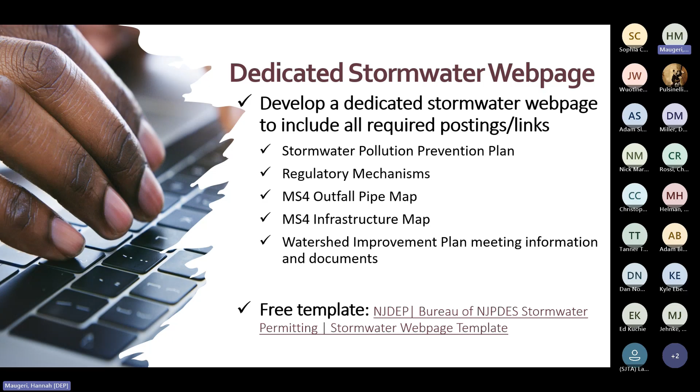Okay, moving on to local public education and outreach. The SPC will arrange for a variety of education and outreach to the public. This is required for all permittees, not just those that operate rest areas.

For highway agency permittees, we're using a 7-point system where you select at least 3 activities from the categories described in the permit attachment. One activity must educate on the hazards of illicit connections and improper disposal of waste.

Alternative activities can also count for this requirement as long as department approval is received prior to conducting the activity. Make sure to keep records of your activities and report them in your annual report. If you need ideas or materials, we have some on the webpage that you can use.

Here are the highlights of Attachment A, the point system for public education and outreach activities. These are just some examples of activities that we offer for points. We have designated pet relief areas, promotional item giveaways, some signage, education on regulatory mechanisms, storm drain inlet labeling campaigns, litter cleanup campaigns, etc. You can find a description of each activity as well as their associated point values in Attachment A.

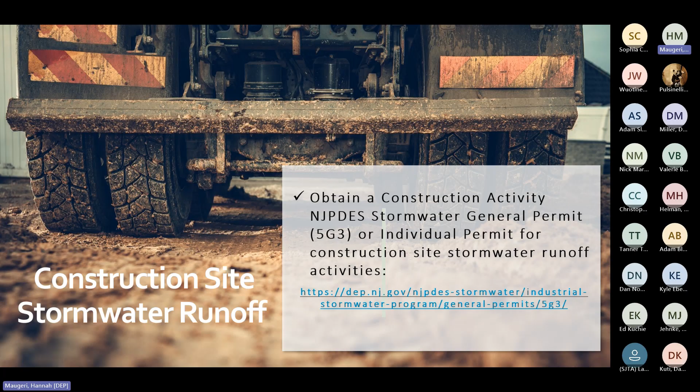Post-construction stormwater management in new development and redevelopment. This condition highlights the requirements related to stormwater management designs for major development projects. If you're the SPC but not the engineer, you won't need to know the technical details, but you do need to be familiar with the process.

Engineers who review and approve major development projects must be different from those who design the projects. They can work at the same firm if that's something you outsource, but please make sure that they are different people who review it and who design it.

Review engineers must complete the department's stormwater management design review, or SWMDR, course every 5 years to stay certified. They also need to attend training on rule amendments if the department determines that training is warranted. We'll talk more about this when we get into the training section.

You can check out our webpage for the list of department certified engineers to confirm the status of the engineer for your facility.

The reviewer must ensure that the projects are designed in accordance with NJAC 7:8, the BMP manual, and constructed according to the approved plans.

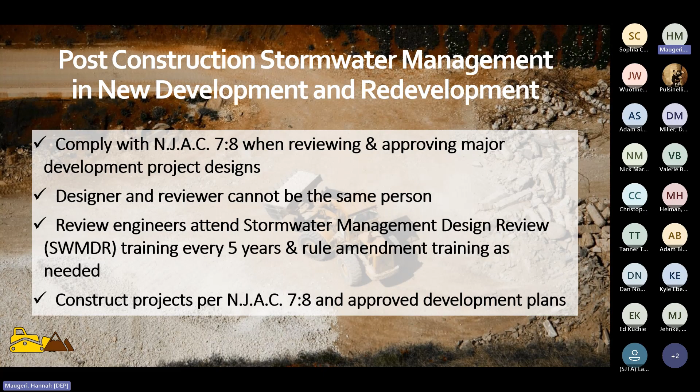For mitigation plans, if your facility wants the ability to grant variances from the design and performance standards for your stormwater management measures, there needs to be a written mitigation plan that satisfies the criteria in the stormwater management rules. It needs to meet and identify the measures necessary to offset the deficit created by granting the variance.

Each time your agency grants a variance, you need to send a report describing the variance to the department via NJDEP online within 30 days of approval.

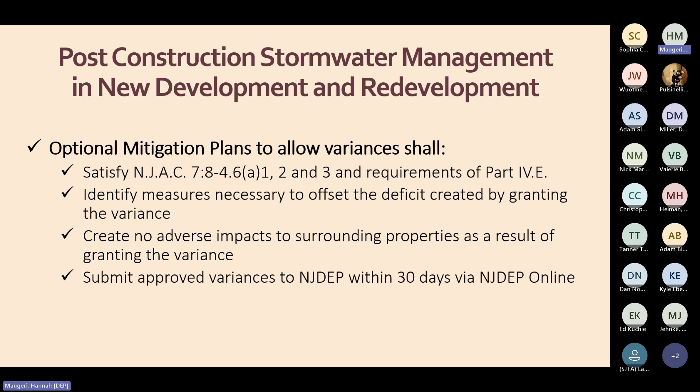Okay, moving on to regulatory mechanisms. Regulatory mechanisms are aimed at minimizing stormwater pollution and flooding throughout the highway agency properties, not just at major development sites. The purpose of community-wide regulatory mechanisms is to have methods in place to keep pollutants out of stormwater so it doesn't make its way to streams, lakes, and other water bodies.

These pollutants can contribute to harmful algal blooms, cause beach closings, and a host of other negative impacts. Regulatory mechanisms help to keep the community clean by setting a standard for the public and ensure you have a way to punish those who violate these regulatory mechanisms.

So we're going to go through each regulatory mechanism briefly. We're going to start with pet waste. The intent here is to get people to clean up after their pets so their waste stays out of the stormwater system and ultimately out of the watershed. Highway agencies can also use this mechanism to completely prohibit pets from being allowed on highway agency property.

Wildlife feeding. The intent is to stop people from feeding wildlife, like ducks and geese, for example, to discourage them from gathering where they can leave droppings on public property that also pollute the watershed.

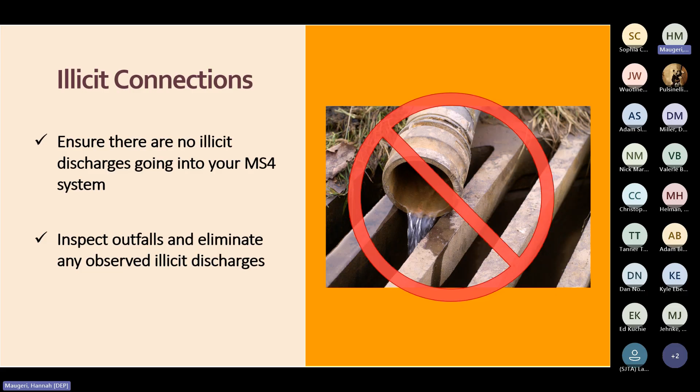Litter pickup program. All permittees must develop a litter pickup program that includes roadside cleanup of trash and debris and regular collection of refuse from litter and recycling receptacles, including those located at rest areas. You must maintain records of roadside cleanups and estimates of the total amount of trash and debris collected.

Street sweeping. Sweeping streets provides more than just aesthetic benefits. It keeps dirt, debris, and litter out of the stormwater system where it would otherwise pollute the watershed. It helps alleviate flooding from clogged storm drains and can help reduce the frequency of catch basin cleanings. This requirement was not changed from the last permit. You're only responsible for sweeping roadways that you own and operate. While these are the minimum requirements, the permittee must sweep more frequently as necessary to eliminate recurring problems.

First we have quarterly street sweeping. The permittee shall sweep at a minimum of once every 3 months all segments of limited access highways, which includes ramps and parking areas that have storm drain inlets or discharge directly to surface water.

Triannual street sweeping. The permittee shall sweep at a minimum of once every 4 months all segments of streets, ramps, and parking areas that have storm drain inlets or discharge directly to surface water, but are not considered limited access highways.

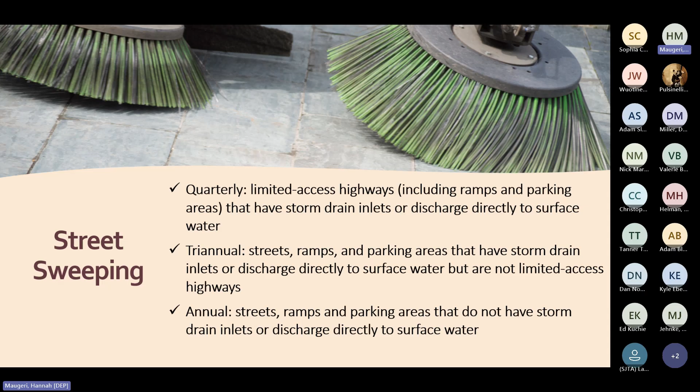On the left here, we have a photo of a rest area parking lot with inlets that discharge directly to surface water. This needs to be swept 3 times a year under the highway agency permit. On the right, we have a photo of a limited access highway, which needs to be swept 4 times a year under the permit.

Streets, ramps, and parking areas that are owned and operated by the permittee, but do not have storm drain inlets or discharge directly to surface water, only need to be swept once a year.

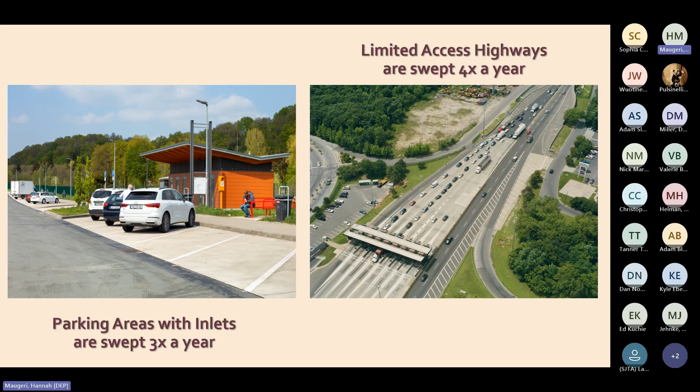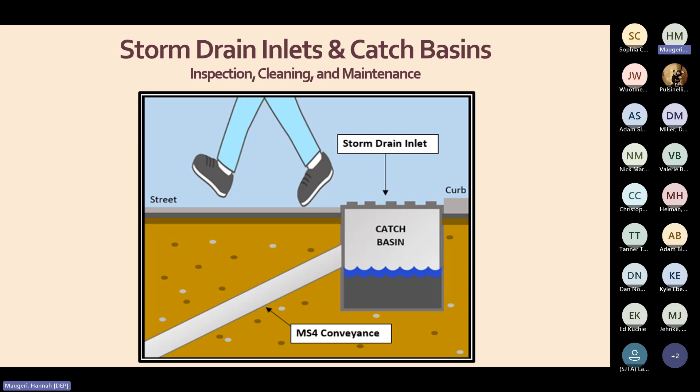Let's talk about the difference between storm drain inlets and catch basins. The storm drain inlet is the top grate that you can walk or drive over, and if it's along the curb, it includes that curbside opening. We consider the inlet to be the parts you can see on the surface. The catch basin is below the surface, typically straight below the inlet, but sometimes further down the pipe, where it catches any debris that falls through the grate.

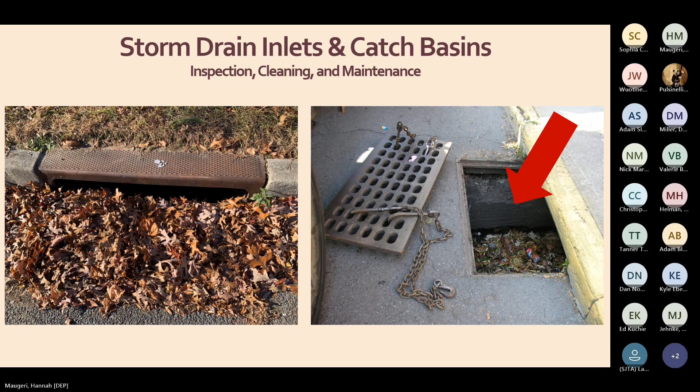All permittee-owned storm drain inlets must be retrofitted by the end of the permit cycle, which is by the end of 2029 for highway agencies.

New storm drain installations must have a corresponding catch basin or other BMP designed for solids collection. It can be directly below the inlet or downstream of the new storm drain inlet, as long as it's prior to the discharge to surface water. Exemptions for this condition include storm drains built on bridges or culverts, or when additional hydraulic losses will result in unavoidable adverse impacts. So that's about it for storm drain inlets.

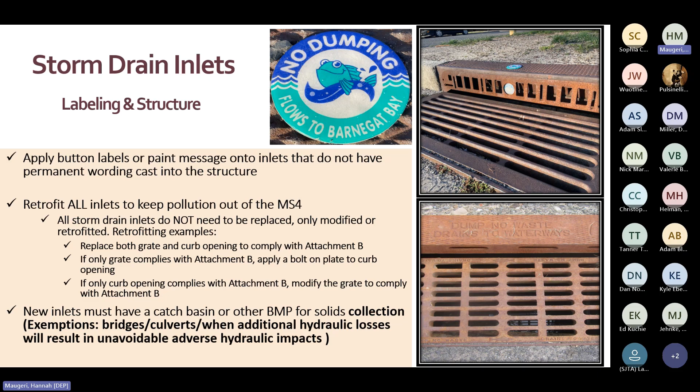Let's talk about the inspection and maintenance of storm drain inlets and catch basins. For inlets, these inspections can be done by driving to each inlet and just hopping out of the truck if trash, leaves, branches, or other debris needs to be removed, or if you see signs of damage. For this reason, we require that all permittees inspect all storm drain inlets every year.

For catch basins, this involves a little bit more work. The inspector needs to get out of the truck, look down inside with a flashlight, or maybe lift the grate to see if the catch basin needs cleaning. If the highway agency operates or maintains more than 2,500 catch basins, the requirement is to inspect a minimum of 20% of the total every year, on a rotation, so that by the end of the permit cycle all catch basins have been inspected. If the highway agency operates or maintains less than 2,500 catch basins, then they must be inspected annually.

When it comes to catch basin cleaning, please check the manufacturer's recommendations first. The EPA also has a guidance document where they advise removal of materials once the sump pit becomes 40% full. So just keep that in mind.

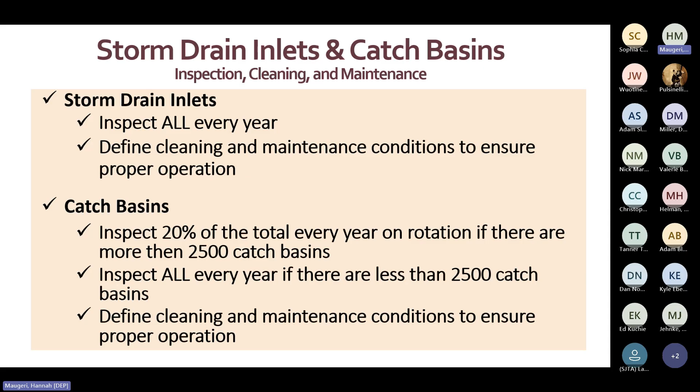Okay, moving on to outfall inspections. For highway agencies, the requirement is to inspect a minimum of 20% of the total amount of outfalls you have every year, on rotation, so that all outfalls are inspected by the end of the permit cycle. The department offers outfall inspection forms on our webpage to document your findings. These inspections must include checking the overall structural integrity of the outfall, clogging, and instances of stream scouring and illicit discharges. So the next two slides will focus on scouring and illicit discharges.

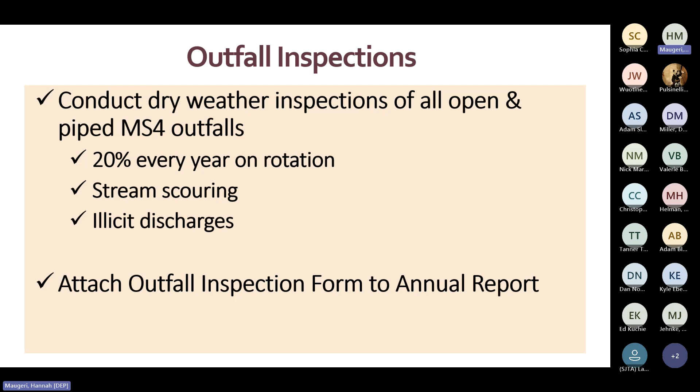Starting with stream scouring, this can present as gouging out of the stream bank, undermining the outfall structure. Scouring erodes soils, clogs stream beds, and ruins habitats. When performing inspections, note if the soil is eroding away around the outfall and if stabilization is necessary. And just so it's understood, scouring inspections are required for all outfalls, not just those that discharge to streams.

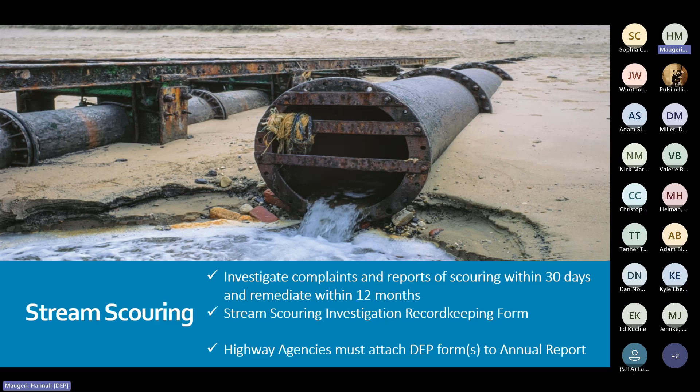All reports of stream scouring must be inspected within 30 days, and confirmed cases need to be remediated within 12 months of discovery, unless the department approves an alternative timeline. The department has a form available on our webpage to document stream scouring cases.

Illicit discharge detection and elimination. When you're inspecting outfalls for illicit discharges, look for instances of dry weather flow, which means a flow coming from the outfall 72 hours after a rain event.

Other indicators include foam, turbidity, colored or overly fragrant discharges, and the presence of sanitary waste items. All reports of illicit discharges must be inspected within 30 days, and confirmed cases need to be remediated within 12 months of discovery. All permittees need to use the department's illicit discharge form and upload it with the annual report.

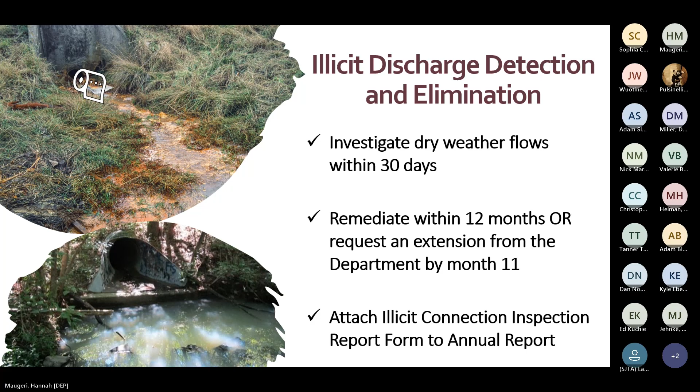All right, moving on to MS4 conveyance systems. Stormwater conveyance systems include any man-made features that convey stormwater. This typically means pipes, ditches, swales, and concrete drainage channels. This also includes cases where the structure below the inlet does not have a sump and therefore isn't a catch basin. Those situations should also be treated as conveyance and maintained as such.

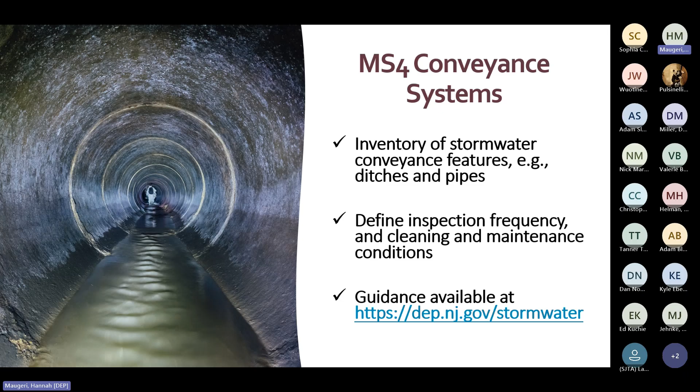This is not a new permit condition for any MS4 permittee, but what is new is that you need to describe your inspection and maintenance program in your SP3 and cover it during annual training of the staff who did this work. We don't specify in the permit exactly when you should do inspections and maintenance, since there's a lot of variation in conveyance systems. So just tailor your program to best suit your system, and the department has guidance available if you need it.

So far we've talked about inspecting storm drain inlets, catch basins, outfalls, and conveyance systems. These are the most common components of stormwater infrastructure, but we know there are other features our permittees use, so we created this catch-all condition. It applies for anything else you use to manage stormwater, things like basins, MTDs, etc.

For anything that falls in this category, explain what it is and define the conditions that warrant cleaning and maintenance per the approved maintenance plans. If an approved plan is not available, you can create one by following the department's best management practice manual or maintenance guidance, both available on our website.

If the feature in question is not included in our BMP manual or guidance materials, conduct inspections at least 4 times a year and after each rainstorm exceeding 1 inch of total rainfall. If any of the infrastructure is found to not be functioning properly, maintenance and repairs must be done no later than 90 days from discovery.

If you need any assistance, of course, you can always contact your MS4 case manager to help you or put you in touch with our stormwater engineering group to do inspections and maintenance, to point you in the right direction.

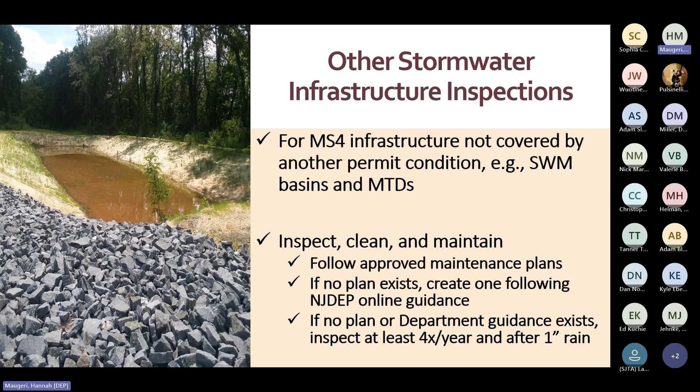Okay, moving on to herbicide application management. If you use herbicides to kill weeds, the permittee must ensure that they're being applied properly to prevent it from being washed into waterways and causing erosion from devegetation.

Avoid spraying herbicides on or near storm drain inlets and on steep slopes, and only spray in areas where it's unsafe or impossible to mow. When spraying around structures like telephone poles, keep it within a 2-foot radius.

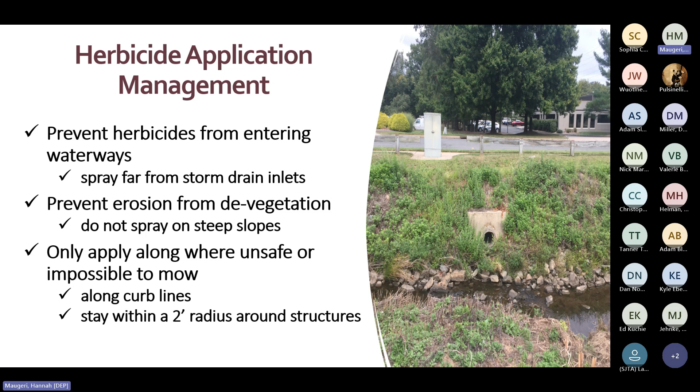Excess de-icing material management. The management of excess de-icing material is not related to how you store your salt supply at the maintenance yard. We'll talk about this proper storage later. This condition is aimed at cleaning up the little piles that are sometimes accidentally left behind in parking lots or along roadways where the driver starts up or stops the spreader.

Within 72 hours after a storm event, please check where your spreaders have worked to clean up any piles you find. This way, the materials don't wash into nearby waterways.

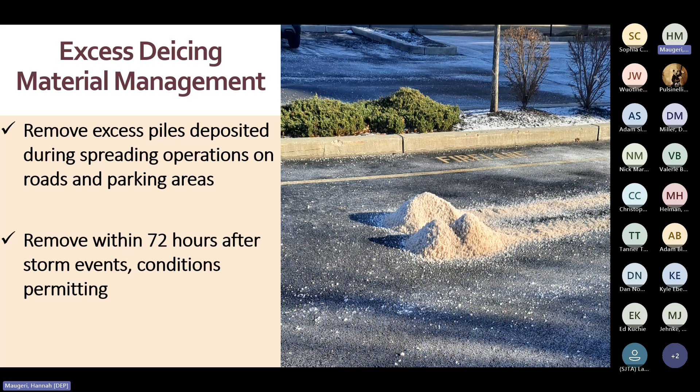Roadside vegetative waste management. Grass clippings, dead leaves, and tree branches that get into the MS4 have the potential to clog the conveyance system and cause flooding. These materials also increase the levels of nutrients and total suspended solids in the receiving waters, which may result in harmful algal blooms and interfere with the aquatic habitat.

This permit condition is intended to ensure that your staff are handling this type of vegetative waste in a way that keeps it out of the stormwater system. For example, you may choose not to bag grass clippings. It's okay to leave them in place. If you collect or clean up the vegetative waste, explain how you keep materials out of the stormwater system.

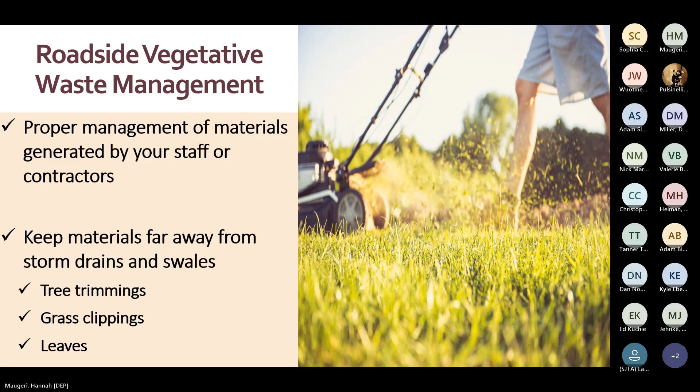Okay, moving on to tree replacement management. This permit condition comes into play when you're removing healthy trees from your highway agency property. These details are in the permit, but depending on the size of the healthy trees removed, you'll replace it with one or more trees. Removed trees are required to be replaced within one year of removal.

There are a series of exemptions to this permit condition. For example, if a tree is considered a hazard, you may remove it without needing to replace it. Hazard trees are trees that are diseased, infested by insects, dead, or dying. It's also fine to remove trees that obstruct traffic signs, pedestrian walkways, or safe passage of vehicles. And if you have a concern about the condition of a tree and an arborist declares that it's a threat, those are fine to remove too. This condition only comes into place when you're trying to remove perfectly healthy trees.

Roadside erosion control. Roadside erosion can cause sedimentation of receiving waters and stormwater infrastructure and can pose a public safety concern. For this reason, erosion inspections are required along all roadways, ramps, and parking lots you own or operate. You must have a roadside erosion control program in place, regardless of whether all roads within your facility are curbed or not. Erosion checks can be done while performing other stormwater inspections. If problems are identified, the department allows 3 months to address it unless another time frame is authorized.

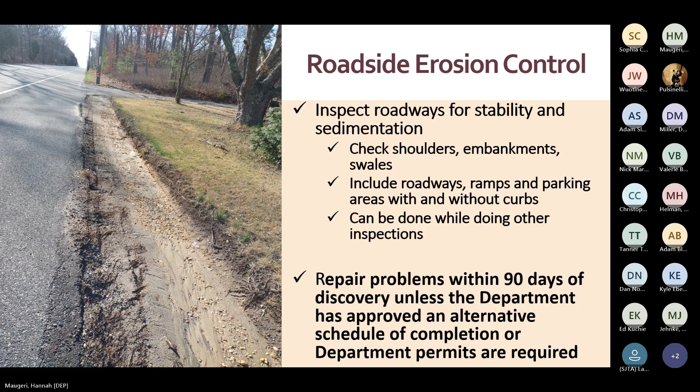Outdoor refuse containers and dumpsters. The permittee must ensure that refuse containers and dumpsters that are outdoors or exposed to stormwater are managed as follows. They must always be covered with a tarp, lid, or under a permanent structure to prevent contact of waste materials with stormwater, unless actively being filled or emptied. And they must be leak-proof to prevent discharge from the contents of the container.

Temporary demolition containers, or containers that hold large bulky items like furniture, do not need to be leak-proof as long as they do not contain waste. Litter receptacles and refuse containers at industrial facilities authorized to discharge stormwater under a valid NJPDES permit do not fall under this condition.

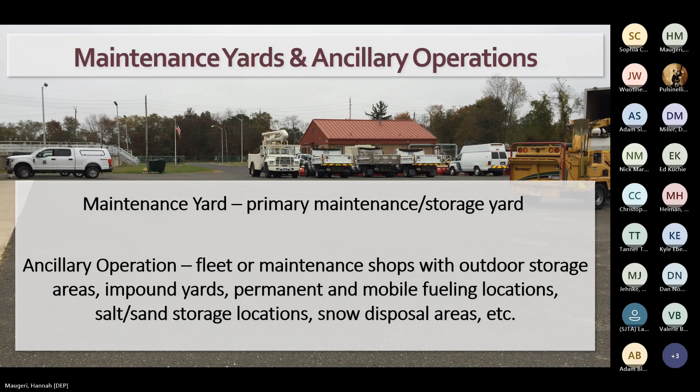Maintenance yards and ancillary operations. There are specific BMPs that must be implemented at each maintenance yard and ancillary operation. So let's go through them now.

Site inspections. Usually, DPW or maintenance supervisors will designate someone to inspect each yard, or will do this themselves. The inspector will note the conditions and document any work that is done or needs to be done to fix problems.

Inventory list. Keep a list of all materials and machinery that are exposed to stormwater, since they are potential sources of pollutants.

Container labels and storage. Label all containers so they are clean and easy to read. Protect containers from being damaged or spilled, making sure they are tightly closed when not in use. Containers stored outside should be covered and set on a spill platform, clean pallet, or in an area graded or bermed to prevent stormwater run-through.

Spill kits. Keep a spill kit near any liquid transfer areas and make sure it's protected from the elements. Be sure to use dry cleaning method only, for example, kitty litter or sawdust, and sweep it up for proper disposal afterwards. Bulk liquid storage.

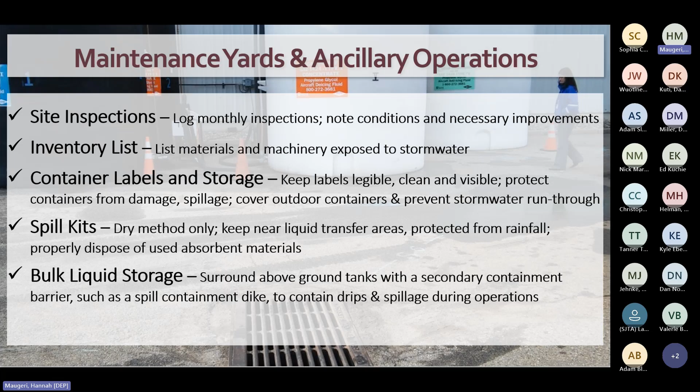Fueling and other bulk liquid operations. During operations, be sure to use drip pans below hose and pipe connections and block any nearby storm drain inlets. Don't delay repairs or replacement of broken fueling equipment. Post signs prominently in the fueling station to include the specific language outlined in your permit.

We have a sign template on our MS4 webpage. You can copy it if you like.

Discharge of stormwater from secondary containment. When you empty the stormwater from the collection areas surrounding the tank, be sure to dispose of it properly. If you have determined that it's clean, you can just open the valve and let the stormwater flow out. If it appears contaminated, or if you are not sure, haul it off site for proper disposal. If the contents inside the tank are clear, you may not be able to determine if any got mixed into the stormwater, so assume it is contaminated and haul it off site for disposal.

Vehicle and equipment maintenance. Perform these activities indoors whenever possible. If you must work outdoors, use portable tents and drip pans and work in areas far from storm drains, or block any nearby storm drain inlets.

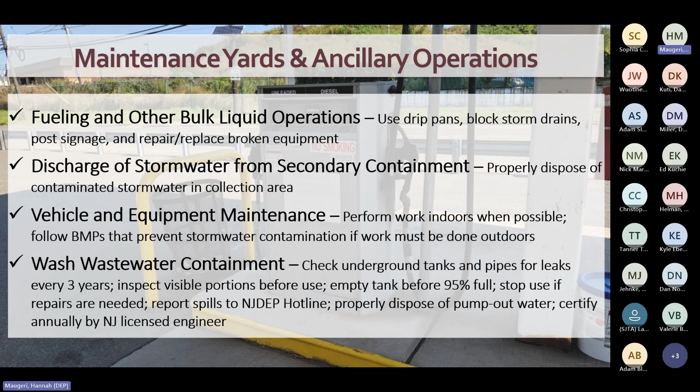Wash wastewater containment. Wastewater tanks need to be certified each year by a New Jersey licensed engineer. Underground tanks and pipes must be checked for leaks every 3 years, and the visible portion should be checked before every use. Check the capacity and pump out prior to reaching 95% tank capacity, and stop use immediately if repairs are needed. Report spills immediately to the NJDEP hotline and properly dispose of pump out water.

Salt and other granular de-icing and anti-icing material storage. These materials must be stored in a permanent structure and in a way that minimizes exposure to rain, snow, and stormwater run-on. If you don't have a door on the structure, that's okay. Just be sure to keep the materials from overflowing beyond the protection of the storage structure. Sweep up any tracked or spilled materials after loading and unloading.

Aggregate material, wood chips, and finished leaf compost storage. Store these materials at least 50 feet from surface water bodies, storm drain inlets, ditches, and other stormwater conveyance channels. Use a 3-sided storage bay, dikes, berms, hay bales, sandbags, and/or grading to minimize stormwater runoff and run-on. Storing these materials is fine, and finished materials may be stored on site indefinitely. However, if your site processes compost or does chipping, grinding, screening, or size reducing of wood waste or yard trimmings, you'll need an industrial stormwater permit for these activities.

Construction and demolition waste, wood waste, and yard trimming storage. Store these materials at least 50 feet from surface water bodies, storm drain inlets, ditches, and other stormwater conveyance channels. Use 3-sided storage bays, dikes, berms, hay bales, sandbags, and/or grading to minimize stormwater run-on and runoff.

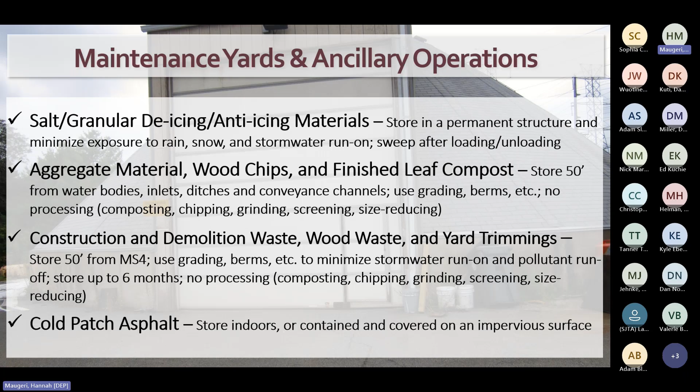Cold patch asphalt storage. This material must be stored indoors or stored on an impervious surface covered with a waterproof material and contained to prevent stormwater contamination.

Street sweepings and storm sewer cleanout material storage. Keep these materials in a leak-proof container or stored on an impervious surface and covered with a waterproof material and contained to prevent materials from contaminating stormwater. Materials may not be stored longer than 6 months, or the site would need to apply for a solid waste permit.

Scrap tires. Store scrap tires in a covered container or enclosure. If a covered container or enclosure is not available, tires may be stored on an impervious surface and covered with a waterproof material.

Inoperable vehicles or equipment. The designated storage area must be at least 50 feet from storm drain inlets. Use tents, covers, and drip pans under leaking vehicles and check them during monthly site inspections. And finally,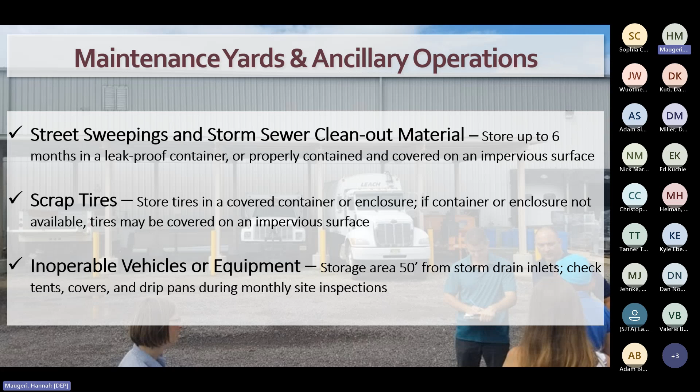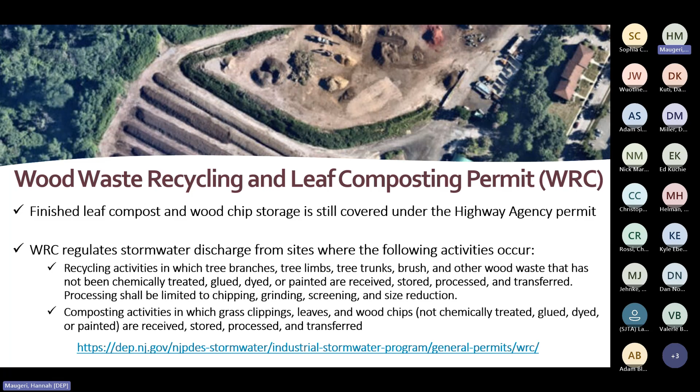Training requirements. As the Stormwater Program Coordinator, you are responsible to make sure everyone is getting the right training at the right time. You are also responsible for making sure training records are kept to demonstrate compliance with the training requirements. Let's go through each type of training requirement.

Stormwater Program Coordinator training. Yes, this is the training we're doing right now. We developed this training to make sure that the permit is interpreted and implemented correctly and consistently throughout the state. All Stormwater Program Coordinators are required to attend this training once every permit cycle, so about every 5 years. You are welcome to attend more frequently than this if you want a refresher, and you may also invite other staff who work in your stormwater program who want to attend.

During training sessions, we will be monitoring attendance and keeping records to make sure the SPC for every highway agency has been trained. If you change jobs or retire, someone at your agency needs to let us know who will replace you within 30 days. Your replacement must attend the next available live session. We plan to hold them twice each year. We suggest new SPCs watch the recorded training session posted on the MS4 website as an introduction to the requirements.

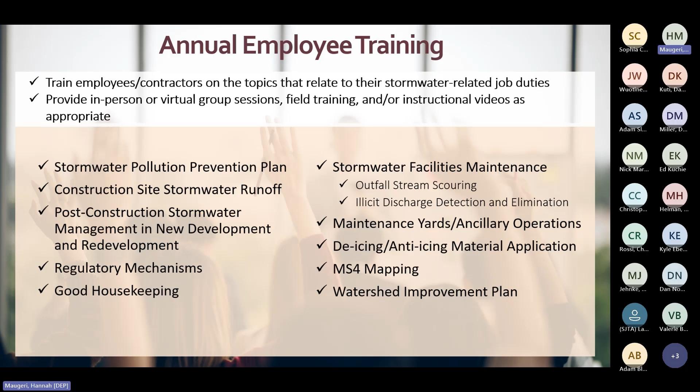You most likely don't have a training department, so a discussion of these topics should be conducted each year, led by the most knowledgeable person you have on each topic. For example, street sweeping training should probably be conducted by the DPW director. If you have a code enforcement officer, that person may cover the regulatory mechanisms. This can be done in a group setting or one-on-one in the field, in the office, or on the computer, however you see fit. The SPC is responsible for ensuring that all required training is held and all appropriate records are kept in accordance with the permit.

De-icing and anti-icing material application training.

With the 2025 permit renewal, you are now required to develop a training program on the application of de-icing and anti-icing materials to make sure that all individuals, including employees, contractors, consultants, vendors, or volunteers that apply de-icing and anti-icing materials on your agency's roadways, ramps, and parking areas, complete the de-icing and anti-icing material application training at least once per year. The training should emphasize procedures specific to stormwater pollution prevention, as this training is about more than just the layout of routes and the operation of machinery.

Make sure you document the training received by staff, including each participant's name, title, signature, dates of training, and instructors' names, and keep these records on file in your SP3. Also, make sure that external contractors, consultants, and vendors are properly trained by requiring compliance with the training detailed in your SP3 as a condition of the contract.

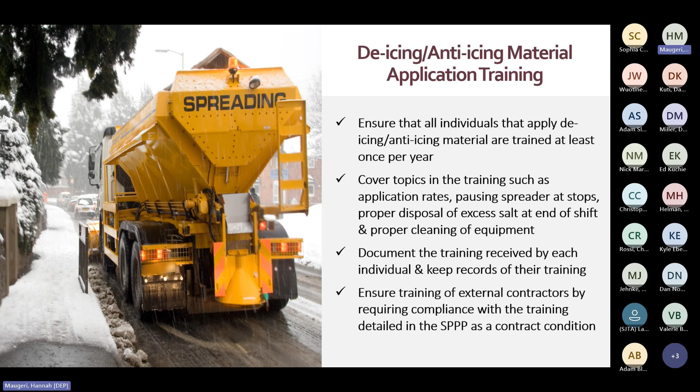Stormwater management design reviewers. The SPC must ensure that those engineers who review and approve designs for major development projects on behalf of the highway agency attend the department's Stormwater Management Design Reviewer training, which we call SWMDR. The purpose of the training is to ensure that projects are designed in accordance with the rules, so that once a project has been constructed, there is minimal impact on stormwater quality and runoff quantity or flooding.

This is a technical course which will cover the most current stormwater management rules, municipal stormwater management plans, municipal stormwater control ordinances, mitigation plans, and the department's BMP manual. This course is approximately 12 hours in length, broken up over 4 half-days, and is required every 5 years. The department has a list of past course attendees and certification dates, so you can check the status of your agency's engineers.

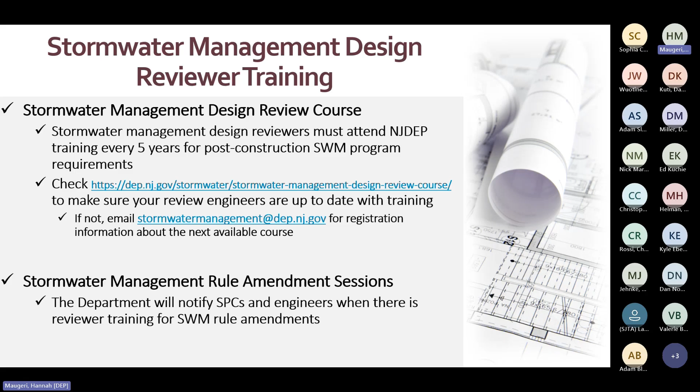If there is an amendment to the stormwater management rules, additional training may be required. If the department determines that training sessions are necessary, engineers must attend within 12 months of adoption of any amendments. Rule amendment training sessions will be announced by the department on the website and via email to all SPCs and to engineers who have attended previous SWMDR courses. If you have attended SWMDR and your email address changes, please let us know.

MS4 infrastructure map.

All highway agencies should have already mapped and submitted their stormwater outfall pipes by December of 2020 and submitted a stormwater facilities map by January of 2023 as required by the 2020 permit.

This map included permittee-owned or operated stormwater facilities such as storm drain inlets constructed after January 1st, 2020, stormwater management basins, groundwater discharge points, manufactured treatment devices, green infrastructure, and property boundaries of maintenance yards, ancillary operations, rest areas, service areas, roadways, and thoroughfares. With the 2025 permit renewal, highway agencies will now need to map all of their owned or operated stormwater infrastructure.

This means mapping everything that collects, treats, or conveys stormwater, including interconnections, manholes, stormwater conveyances, pump stations, and streets, ramps, parking areas, and thoroughfares. This also includes the mapped property boundaries of rest areas, maintenance yards, and other ancillary operations.

Since highway agency permittees should already have their outfall pipe and stormwater facilities mapping data, the MS4 infrastructure map requirement for this permit shouldn't be a huge lift.

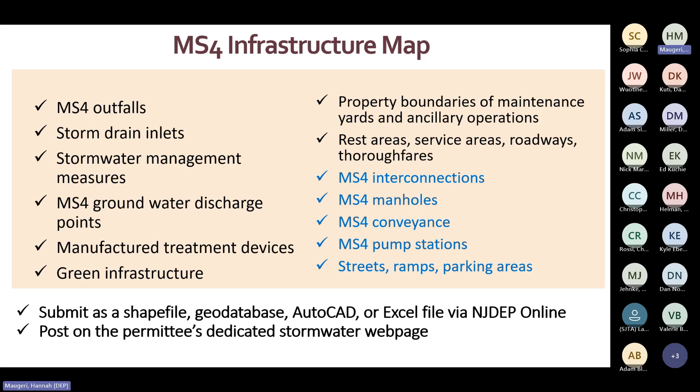It's important to note that we require that all permittees include certain attributes in the electronic data that is submitted. We'll go through each stormwater feature and the required attributes.

Outfalls. The required attributes that must be included in your data are the type of outfall, such as piped or open channel, and the name of the receiving surface water body that the outfall is draining to, such as the Delaware River or any other river or tributary.

If your outfall drains to a ditch, an infiltration basin, or groundwater, then it is not considered an MS4 outfall and should not be included in this layer. These points would be mapped as a groundwater discharge point instead.

Groundwater discharge points. The required attribute that must be included in your data is the type of groundwater discharge point. The two most common types are a constructed infiltration BMP, such as an infiltration basin or a sump inlet, and an overland flow area.

Interconnections. The required attributes that must be included in your data are the type of interconnection, such as a pipe or open channel, and the upstream and downstream entities. For example, if your system discharges into a neighboring municipality, then the upstream entity is you, and the downstream entity is the municipality, and vice versa if you receive stormwater discharge from another MS4 system.

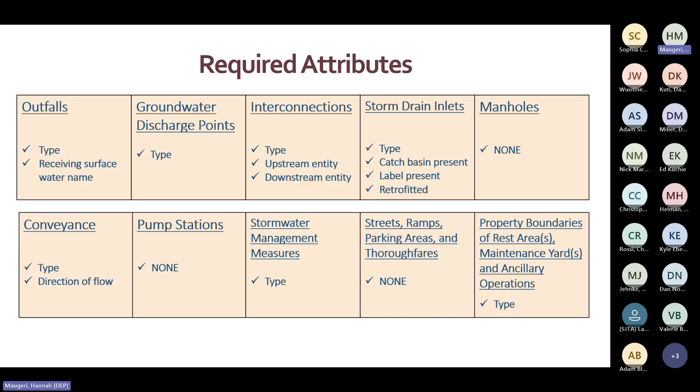Now we'll go into the ArcGIS online mapping tool.

Now that we've gone through the mapping requirements, let's move on to discuss how the department has created tools to help permittees complete their mapping requirements, starting with our free mapping tool.

The department previously created a geodatabase template and associated data dictionary for 7 stormwater feature classes required to be mapped in the 2020 Highway Agency permit. We realize that not every permittee operates in the same manner or has the same technological capabilities. So this geodatabase template was made available over several different collection methodologies to suit the needs of all permittees.

This includes a shared editing map with ArcGIS Online that can be accessed on desktop computers, smartphones, or tablets. We also created a downloadable geodatabase template for permittees who are familiar with and currently using ArcMap or ArcPro with their own licenses. We are working to update and modify the ArcGIS Online shared editing map and the geodatabase template to account for all the new stormwater features required to be mapped for the permit renewal.

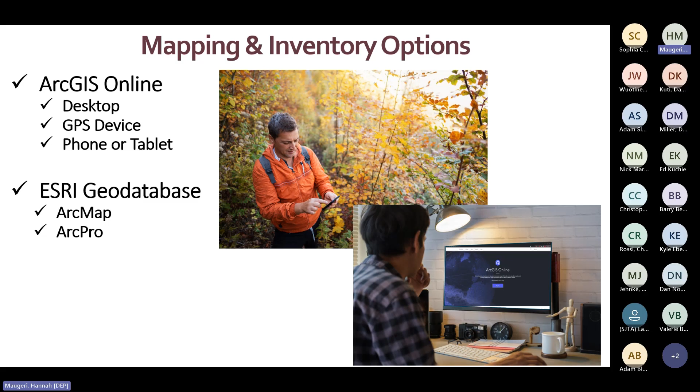As I mentioned, the first method created was a shared editing map in ArcGIS Online. The program allows users to collect points and associated information on a tablet, a smartphone, or a desktop computer. The department secured a pool of free-to-use licenses for our permittees, and they are available upon request.

Additionally, if any permittees already have their own ArcGIS license and would like access to our shared editing map, we are able to invite you to edit the map, so please reach out to your county case manager to get that set up. Data that is collected will be stored in our database and can be viewed publicly and downloaded at any time.

The desktop version of ArcGIS Online is a great way to electronically digitize points from the comfort of your office using an old PDF or tax map. Let's quickly walk through how to access our shared editing map in ArcGIS Online.

Your first step will be to navigate to ArcGIS Online using your web browser. This is what the splash screen looks like. Next, sign in using the username and password assigned to you with your department-provided license or your own ArcGIS Online license, if you have one, and once invited to the editing group.

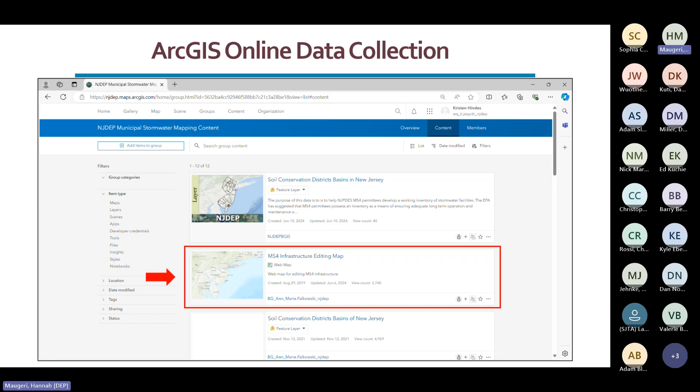Once you scroll down, click on the View All Group Content button at the bottom, which will bring you to this screen, where you will find the MS4 infrastructure editing map. Then click the link to the MS4 infrastructure editing map.

The main page of this map is where you are able to see details along with other information regarding the map. To start editing, you will open the map by clicking on the Open in Map Viewer button.

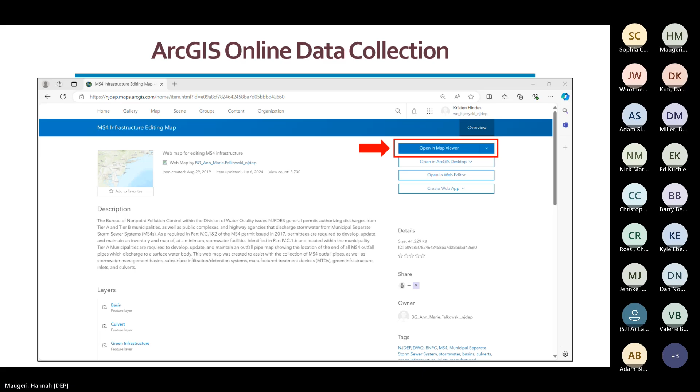This is what the map looks like when you first open it. As you scroll in, you will start to see data points populate. The map is interactive, so if you see points already mapped and are interested in viewing them, you can click on a point and a box will appear, detailing the point's associated attributes.

I want to point out some of the important buttons here on the main map screen. First, you can click the magnifying glass in the lower right corner. Use the search function to find your current location or to search for a specific address, and the search function will zoom you right into that location on your map.

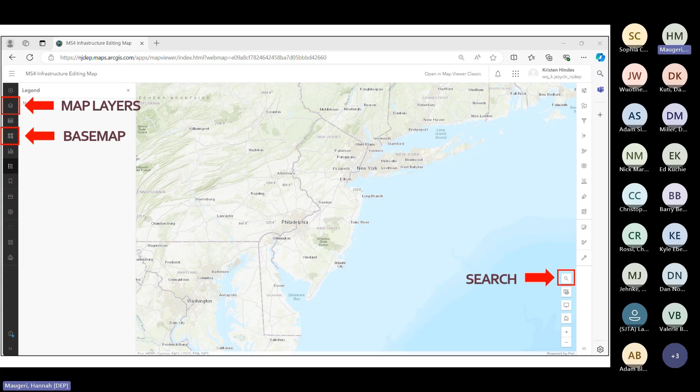Second, this button on the top left-hand side that looks like a stack of squares will show you the different layers that are currently on the map for viewing. Third, click the 4 squares on the left-hand side if you want to change the base map. Typically, an imagery base map is the most useful, especially if you are plotting points using a tax map or knowledge from previous field visits.

When you are ready to start mapping data, click the Edit button on the lower right-hand side. It looks like a pencil and a paper.

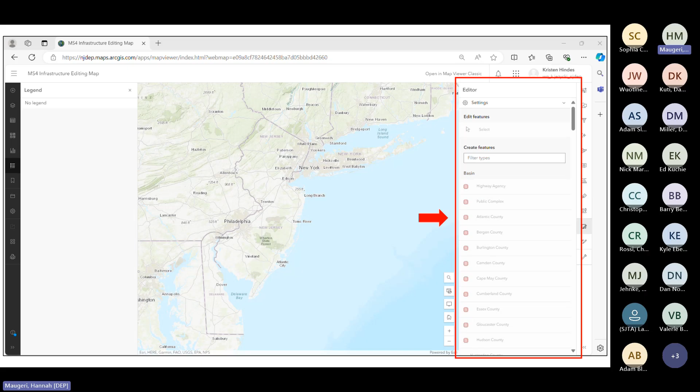Now I'll do a quick step-by-step walkthrough of how to plot a point. To begin, you will click the Edit button to start mapping. This will open a menu on the right side, where you will be able to choose the correct feature class type that you are trying to map, like outfall or inlet, etc.

Scroll until you find the correct stormwater facility type and then the correct county. For example, if you're trying to plot an inlet within Atlantic County, you would click here. Currently, the tool has feature classes for culverts, basins, outfalls, inlets, etc., and is being updated to account for the changes to the mapping requirements in both the Tier A and public complex renewals. The icons are different for each feature class.

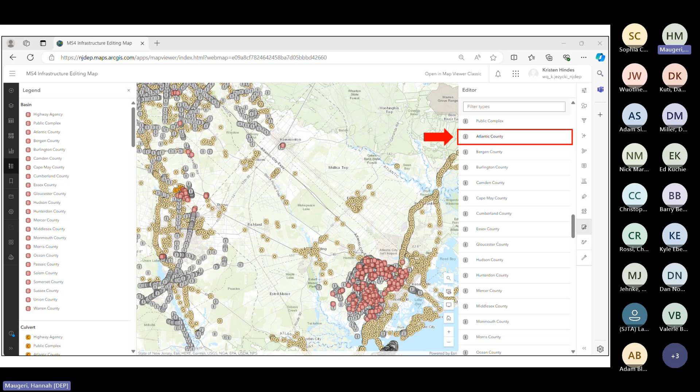Once you click the correct feature class, this will bring up a crosshair with the point, and you will click on the correct location on the map to plot the point.

The menu on the right-hand side will change to display the different attributes you can fill out for the designated point. This will include discharge code, facility name, and others that are specific to each feature class, like type of outfall, or if a storm drain inlet is labeled. Most of these attributes will have drop-down boxes, so it is easier than entering manually.

Once you have finished adding all attributes, click the blue Create button at the bottom of the menu. If something is incorrect before you click Create, you are able to make changes or discard your edits entirely by hitting the back button at the top of the menu.

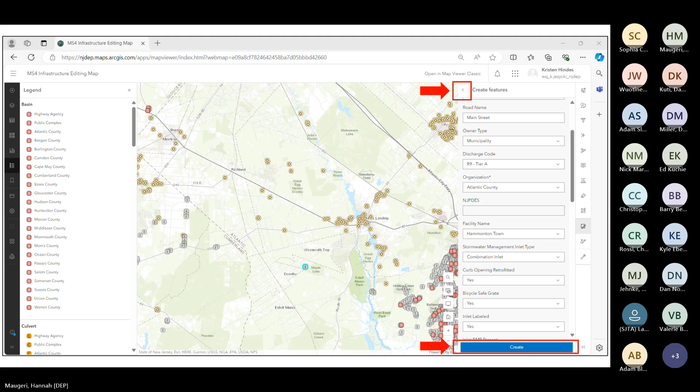If you realize after you hit Create that there is an error in the point or attribute, click on that point on the map, which will highlight it in blue. This will open a box showing all of the point's associated attributes, and you can then make changes by clicking the Edit button at the top.

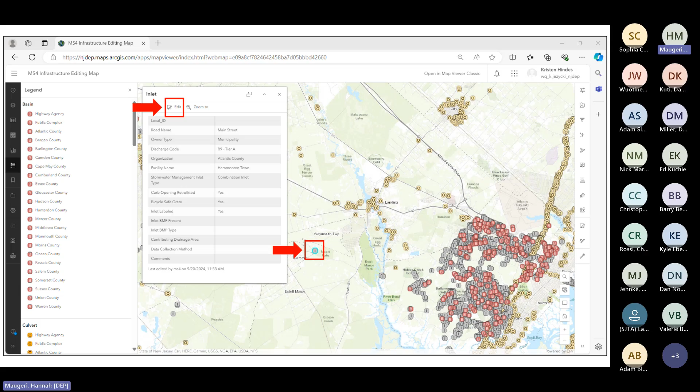However, we don't allow users to delete points to avoid accidentally deleting other people's data. If you plotted a point in error and need to delete it, please add a comment telling us to delete it, and we can take care of that on our end.

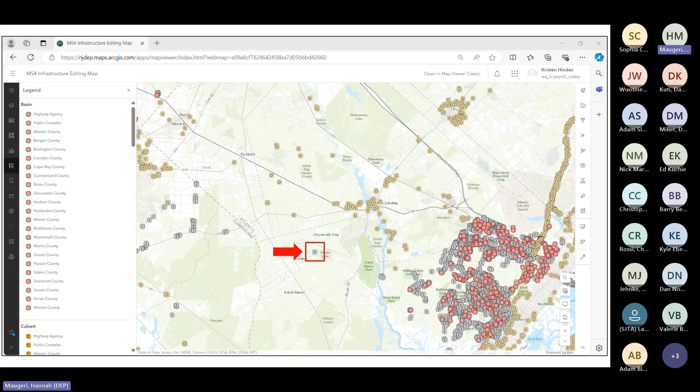As you can see, the point has successfully been plotted where we wanted. Repeat this process as many times as necessary to map all of your stormwater facilities.

Our shared editing map can be accessed on desktop computers and mobile devices as well. The app used for collecting points through ArcGIS Online on a mobile device is called ArcGIS Field Maps and can be accessed through both the Google Play or Apple Store. Some of you may know the previous versions as Collector, but Esri has since transitioned to using this new Field Maps app. The app itself is free to download and use, and once a license is obtained from the department, you can begin mapping.

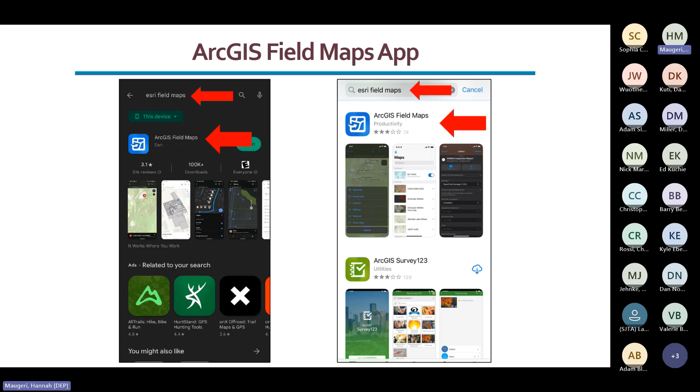This method is the best way to collect new data points out in the field. Once downloaded, the user can collect points by using the mobile device's GPS or by manually placing points using the background aerial. When a point is placed, a list of descriptive attributes will show up and can be filled out. This helps in determining things such as the type of basin or MTD and the ownership of the facility, which is important when conducting maintenance. Most fields have drop-down menus that make it easy to fill out and less time-consuming than typing out each attribute in the field. Let's do a quick walkthrough of how to log into Field Maps to access our shared editing map.

When you open the Field Maps app, you will be prompted with two sign-in options. Choose Sign In with ArcGIS Online and use the username and password assigned to you with your department-provided license or your own ArcGIS Online license, if you have one and were invited to the editing group. When signed in, you will see a list of all maps that you have access to, which may only be the MS4 infrastructure editing map.

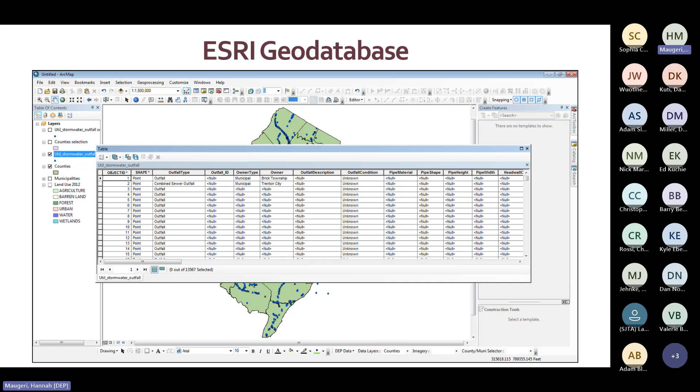For users who are already using ArcMap or ArcPro, we developed a geodatabase that can be downloaded from our website. That geodatabase can be populated on the computer and submitted back to the department to meet the mapping requirements. Again, everything here has drop-down menus, making it easy to use. While the two previous options I showed you provide automatic electronic submission, you will need to upload your geodatabase files via NJDEP online to satisfy the electronic submission requirement.

In summary, NJDEP initially created a database and data dictionary for the stormwater infrastructure features required to be mapped by MS4 permittees. It is currently being updated to account for new mapping requirements in the 2023 Tier A, 2024 Public Complex, and 2025 Highway Agency permits. The data dictionary was made available over several different collection methodologies to suit the needs of all permittees.

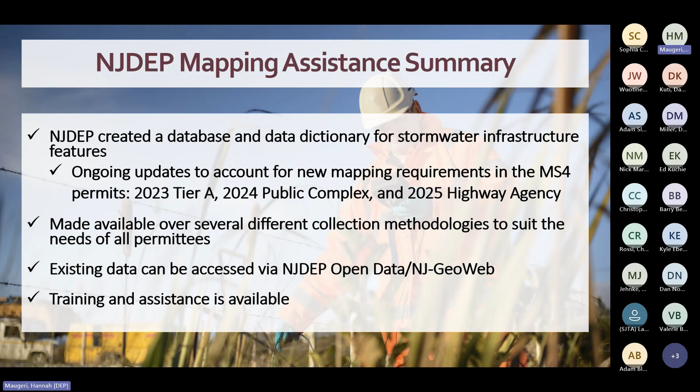Existing data can be accessed via NJDEP Open Data. The department is willing to provide assistance in the form of in-person training and by answering any questions you may have. Please reach out if you need any assistance along the way. This completes this segment, and we will now stop for Q&A and take a bit of a break.

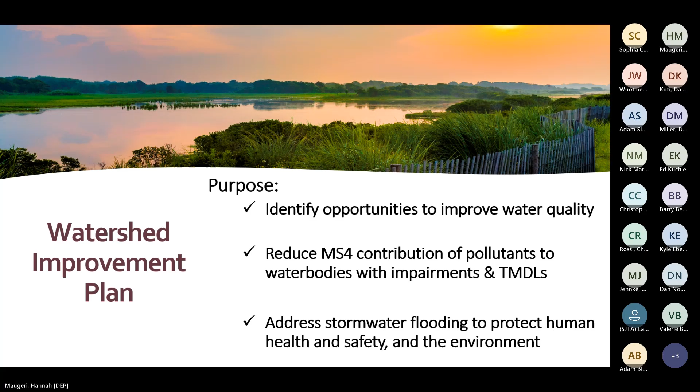Before going further into the requirements of the watershed improvement plan, let's look at our current water quality concerns within New Jersey. We'll first go through some impairments and how they are related to stormwater.

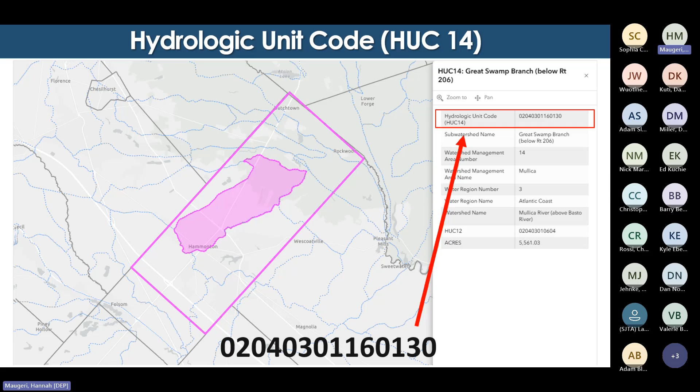Before a TMDL is developed for a pollutant, it is likely that the pollutant and water body will be designated as impaired first. Every 2 years, New Jersey is required to submit a water quality assessment report under Section 303D of the Clean Water Act, describing the conditions of the water within the state. These reports include water quality information on rivers, lakes, estuaries, coastal waters, and analysis of the extent to which these waters are meeting the current water quality standards.

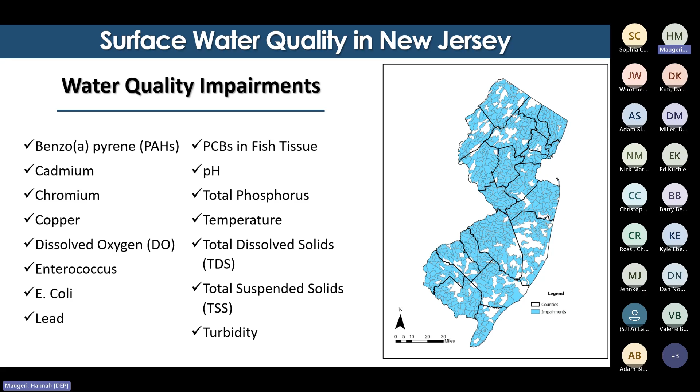Waters are assessed as impaired when an applicable water quality standard is not being attained. Impaired waters will require a total maximum daily load or an alternate restoration plan to reduce pollutant loadings and restore the water body. Listed here are the parameters related to stormwater that New Jersey waters are currently impaired for.

Next up, we're going to talk about what is a TMDL. A TMDL is short for total maximum daily load. It is the calculation of maximum amount of pollutants allowed to enter a water body so that the water body will meet and continue to meet the water quality standards for that pollutant. A TMDL determines a pollutant reduction target and allocates load reductions necessary to the source of the pollutant. This will result in a report or a plan to address the pollutant parameters for that specific water body.

Each pollutant causing a water body to be impaired or threatened is referred to as a pollutant parameter, and typically a TMDL is developed for each pollutant parameter for each affected water body. For example, if one water body is impaired or threatened by 3 pollutants, 3 TMDLs will be developed for that water body. However, in other cases, a single TMDL document may be developed to address several water body/pollutant parameter combinations.

Who is responsible for developing these TMDL documents? As a general matter, each state is responsible for developing TMDLs and submitting them to the EPA for approval. EPA then reviews under the Clean Water Act and either approves or disapproves the TMDL.

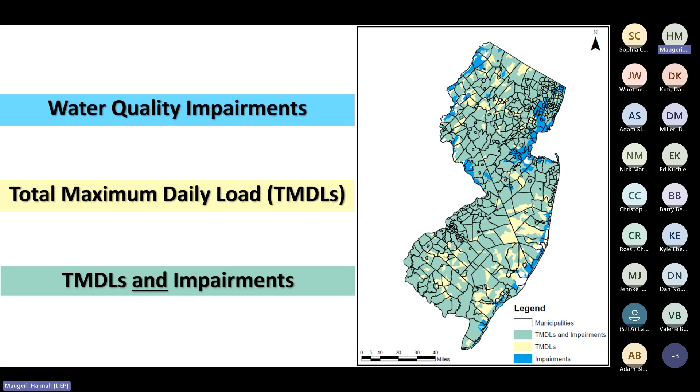It's very common for one subwatershed in New Jersey to be impaired for many parameters related to stormwater. Let's go back to our example of Great Swamp Branch below Route 206. There's a TMDL developed for total coliform to address shellfish in impaired waters, and this subwatershed is also impaired for both pH and nitrate.

Here, I'm going to highlight some of the common pollutants related to stormwater in New Jersey, along with some of their sources. Wildlife, pet, and human waste contribute to bacteria pollutants such as fecal and total coliform and E. coli. So if you manage a restaurant, for example, you may want to keep an eye out for these parameters.

Fertilizers, leaf litter, and other vegetative waste contribute to increasing total phosphorus, nitrate, dissolved oxygen, and pH. This is why it is important to enforce certain good housekeeping measures, such as herbicide application management and vegetative waste management.

Runoff from impervious surfaces, roadside erosion, and road salt and leaf litter also can contribute to the increase in TDS, TSS, and turbidity. Vehicles, asphalts, and building materials contribute to increase in metals, PCBs, and VOCs. And finally, deteriorating pipes can contribute to the increase in lead and copper in waterways.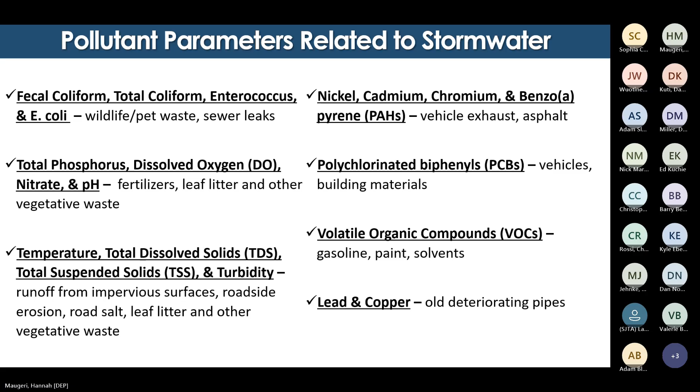Here is an overview of the watershed improvement plan requirements. Each of these phases will be submitted through the Stormwater Document Submittal Service via New Jersey DEP Online. The department recognizes that the development of the WIP is a significant undertaking, so we will be available for guidance throughout the process. The development of the plan is divided into 3 phases.

Phase 1, which is due by January 1st, 2028. The goal of this first phase is to inventory all stormwater-related information, which will be used to inform what is likely contributing to the water quality and quantity problems, and where improvements could be implemented, which then leads us to Phase 2.

Phase 2, which is due by January 1st, 2029. The goal of the next phase is to evaluate the information that was gathered in Phase 1 to determine what potential improvement projects can be implemented for both quality and quantity risk concerns.

And finally, Phase 3, which is due by December 1st, 2029. The goal of this phase is to select which of the potential quality and quantity improvement projects from Phase 2 you will implement, and on what schedule.

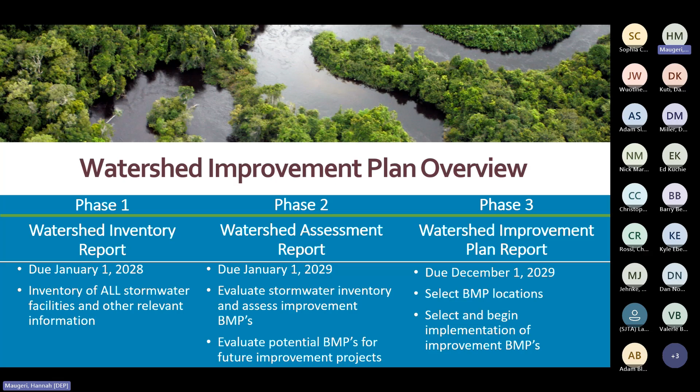So let's talk about Phase 1. I consider Phase 1 to be the gathering all the information stage.

This is going to involve multiple staff members and is going to be closely related to the MS4 infrastructure map, which is also required to be submitted on the same date. This step will involve adding a few more data sets to the MS4 infrastructure map we discussed earlier, analyzing department available data related to stormwater, and summarizing all these requirements into a narrative report.

While collecting MS4 infrastructure data, permittees may want to consider collecting at the same time additional data required by the watershed inventory report. This includes the drainage areas for each outfall or group of outfalls, the drainage areas for each interconnection, and the areas that are prone to MS4 related flooding.

Next, you'll need to analyze and summarize the rest of the subwatershed information from the department's available data. This will include looking at the receiving water bodies, the water quality classifications for all receiving water bodies, which will show you if there are any FW2 non-trout, Pinelands, or Category 1 streams within your subwatersheds. Also the TMDL and impairment by subwatersheds, which will show which pollutant is affecting which subwatershed.

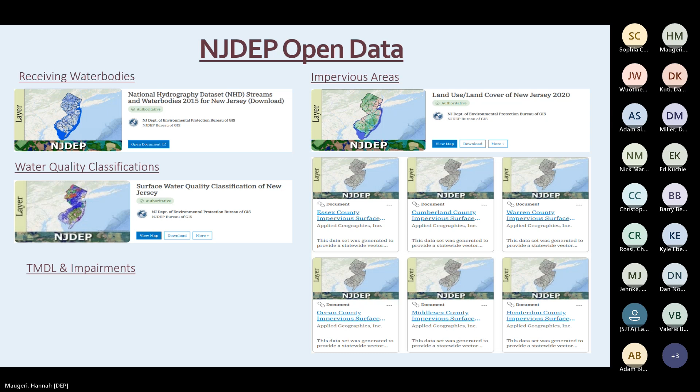So the Watershed Assessment Report Phase 2 is the session where you are looking at what will be created from Phase 1. This involves identifying potential water quality and quantity improvement projects, charting TMDLs and impairments in each subwatershed. The report will also need to include an estimate of the reduction of pollutants and a summary of feedback from public sessions, an estimate of funding needed, and a tentative implementation schedule.

If you're wondering how to determine what types of projects to do to address certain parameters, the department has created a WIP project matrix that can point you in the right direction. The matrix lists various projects that can be implemented and the specific parameters it helps address. It's an Excel spreadsheet, so you can filter for parameters you're aware of, and it will only show projects that address that parameter. A link will be included on this slide, but you can also find it on our WIP webpage.

The permittee shall post the watershed assessment report on its dedicated stormwater webpage and announce a 60-day public comment period.

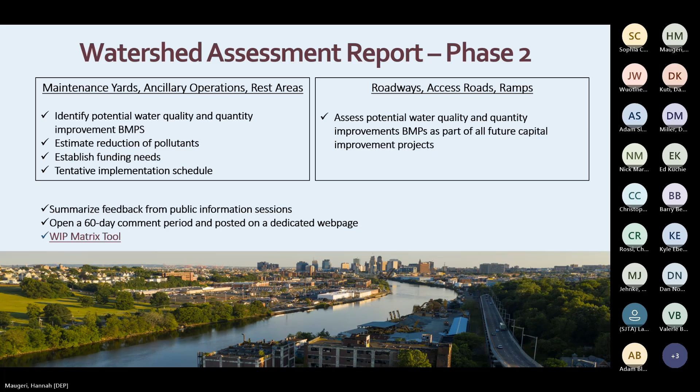The final plan will take the information presented in the Phase 2 report, which was public noticed, and evaluate those public comments, the cost, funding, etc. We'll also identify which projects are to be implemented, including proposed timelines and the expected result. The report will need to include a summary of project locations and its expected load reductions. It will also include the rationale behind the chosen projects and plans to incorporate other regulatory requirements, implementation schedule, and costs.

The Watershed Improvement Plan will also need to be reviewed and updated when necessary, based on the biennial review of revisions to the impairments of the permittee's water bodies, based on the department's integrated report and any newly adopted TMDLs, as well as any other layer updates.

Finally, we are preparing a WIP template including guidance materials for permittees to use. This way, all WIPs are developed statewide following the same format, making it easier for the public and the department to review and compare. We will share these materials as soon as they are finalized.

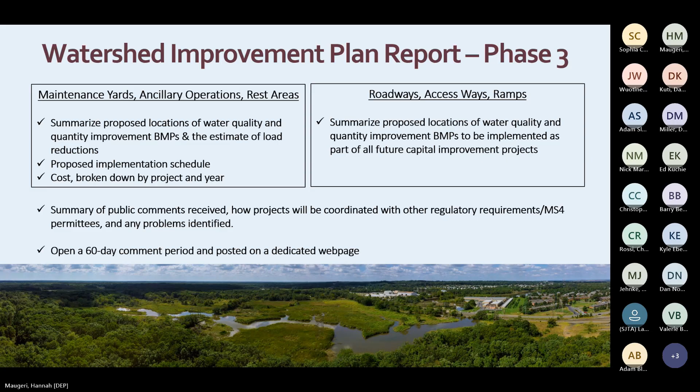Here's just a quick overall timeline of what developing a WIP will look like.

You may decide now, or after phase 1 mapping and inventory has been completed, that you want to combine your improvement efforts with any of the following, such as towns, other MS4 permittees, or other types of NJPDES permittees, and even other third-party groups such as watershed management groups. The collaboration is completely supported by the department.

However, to ensure no one else speaks for you, any regional WIP collaboration would need to be endorsed in writing by each participant, and specifically state which parts of the HUC 14 the regional WIP will apply to, and what specific projects and responsibilities will be undertaken by each party. The regional WIP will need to have that extra level of detail to make sure there is no misunderstanding between entities and/or the department.

As highway agencies, you are required to provide other MS4 permittees that discharge to shared subwatersheds information if they request it, such as MS4 interconnection locations and information regarding the ownership of specific stormwater infrastructure.

Before jumping into the last few permit conditions, does anyone have any questions regarding the development of the WIP? If there's no other questions, I will continue on with the last few slides.

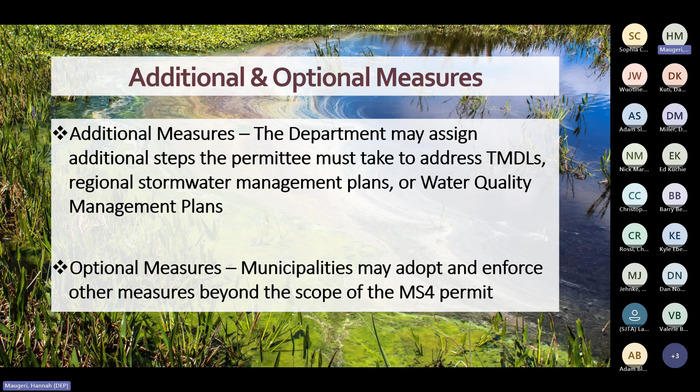When DEP or EPA staff come out for an audit or site inspection, they will be looking at your records to demonstrate compliance with each permit condition. Your job as the SPC is to have these records ready upon request.

Be sure to keep copies of logs that record inspections, repairs, investigations, etc., related to the permittee compliance for at least 5 years.

Every year between January 1st and May 1st, all permittees will report on the previous calendar year by accessing New Jersey DEP Online to submit their annual report. Highway agency permittees are also required to attach the major development project list for any major development projects that were approved within the calendar year.

You must also attach all outfall inspection, stream scouring, and illicit connections forms to their annual report each year. If you are new to submitting an annual report and would like to see previous year submissions, just contact your MS4 county case manager and they will provide whatever reports you need.

Most of you should already be familiar with New Jersey DEP Online, as this is a platform where you access your annual report each year. Some helpful tips that we have for New Jersey DEP Online: create your own New Jersey DEP Online account. You cannot finish a report that another user started.

Contact your case manager if you are unable to complete the annual report. The report may be in progress by another user's account. Write down your password, username, and certification PIN - accounts that are managed by New Jersey OIT. So if you forget your username or password, you will have to use the on-screen help function, and someone from New Jersey OIT will contact you to help correct the issue.